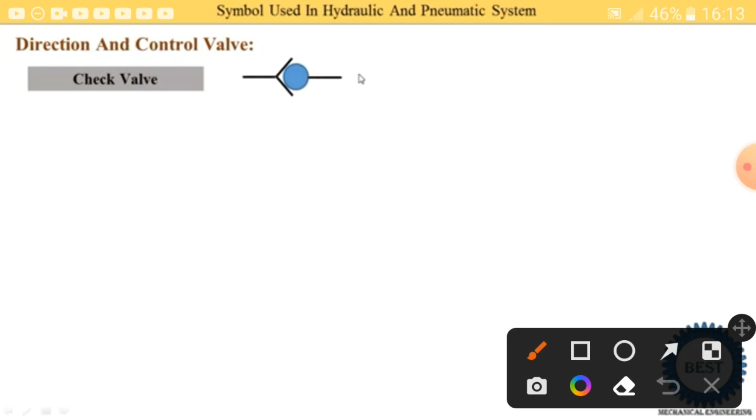Now what is the meaning of check valve? A check valve normally allows fluid, meaning either a liquid or a gas, to flow through it in one direction. So they are one-way valves. The liquid or fluid only flows from one side to another side. Reverse direction is not possible. So this is the symbol of check valve.

Next is the 2x2 valve. Now what is the meaning of 2x2? First we understand that, then we move towards the symbol. The first digit indicates the number of ports. Now what is the meaning of port? Port means it supplies the oil or gas, meaning fluid, from one side to another side. It's like a valve, so it is called the port here. So the port supplies the fluid.

The first digit indicates the number of ports, and the second digit indicates the number of positions. Number of positions means in a directional control valve two positions are possible because here the 2 is written. Now there are 2 positions, so we need to draw 2 squares. So first we draw 1 square.

First we understand how the ports are labeled as P, T, A, B. Generally a 4 port system is used. P means pressure port, so oil or fluid coming from the pump or compressor enters this port, labeled P. The return line is denoted T, meaning tank. And A and B are the different sides of the actuators.

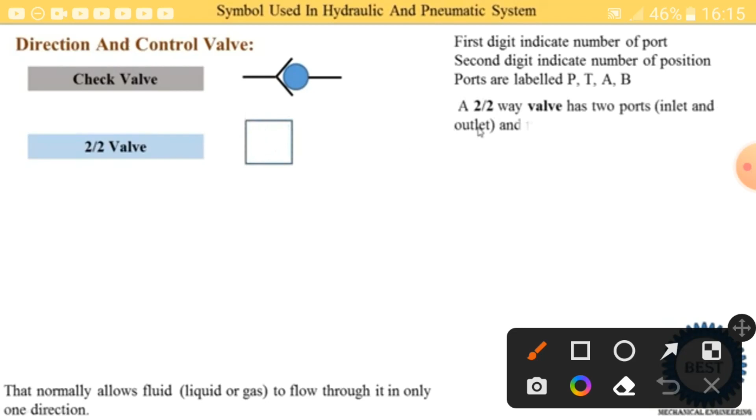So here we draw the 2 squares. The 2x2 valve has 2 ports, one inlet port and one outlet, and 2 positions. One position is used to open the system and the second position is used to close the system. So this is the first square, and this arrow indicates that here the port is P. Why is it P? Because the oil or fluid is coming from the pump or compressor. This is port A, which supplies the actuators. This is one position.

For the second position we need to draw a second square, and the second position is for close. So this symbol is used for the close position. It is also the P port and this is the A port. This is only 2 ports because here it is written as 2.

Now the next one is the 3x2 valve. Later on I explain to you how this symbol works in hydraulic systems. So continue with this video.

The 3x2 valve has 3 ports. One is the inlet, another is the outlet, and one more port. The second digit, 2, indicates 2 positions. One is used to open the system, the second position is used to close the system. There are 2 positions, so we draw 2 squares. And 3 ports means 3 ports are provided in every position, so there are 6 ports in total, 3 in one position.

So here the oil enters the P port and is supplied to the A port. The other one, the T port, is right now in the closed position. Now this is the second position. In the second position, oil returns from the actuators, from port A to port T, and the P port is closed. Here there are 3 ports, named P, T and A: the pressure port, the tank port, and the A port. If there is a 4th, the B port is provided. So I hope you are clear about the number of ports.

In the second position, the oil is supplied from the P port to the B port, and the oil returns from the A port to the T port. This is generally used in double acting actuators, meaning the oil is supplied on both sides of the piston. It is called double acting.

Now the next one is the 4/3 valve. 4/3 means 3 positions are possible and 4 ports are there. So here you see the first position, this is the second position, and this is the third position. Inside every position there are 4 ports.

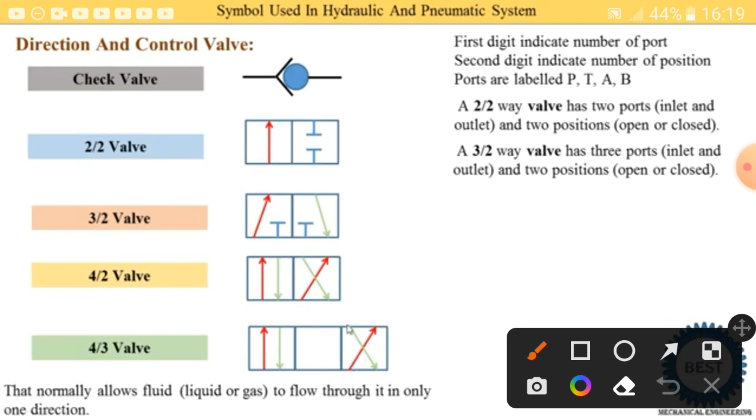In the first position, oil is supplied from P to A, and here B to T. I leave the second, mid position empty because in the mid position there are many variations, which I'll explain later. In the third position, oil is supplied from P to B, and it returns back from A to T.

Okay, so I hope you are clear on this concept. Now before moving ahead, let's discuss the directional control valve mid positions and what possibilities exist in a hydraulic or pneumatic system.

Now the first one is the open center. Here, mid position means we focus only on the mid position ports; the first and third positions are not explained here, we just focus on the mid position.

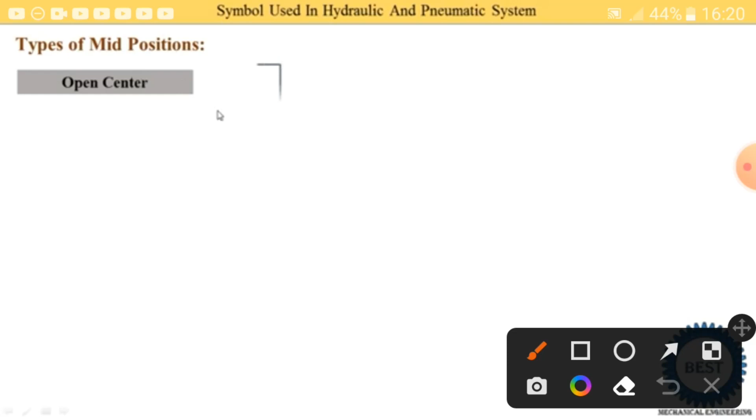Now the first position is the open center. First we draw the square by default. Open center means all 4 ports are connected with each other; it is called the open position. So here P port, T port, A port and B port are connected with each other using this horizontal pipe.

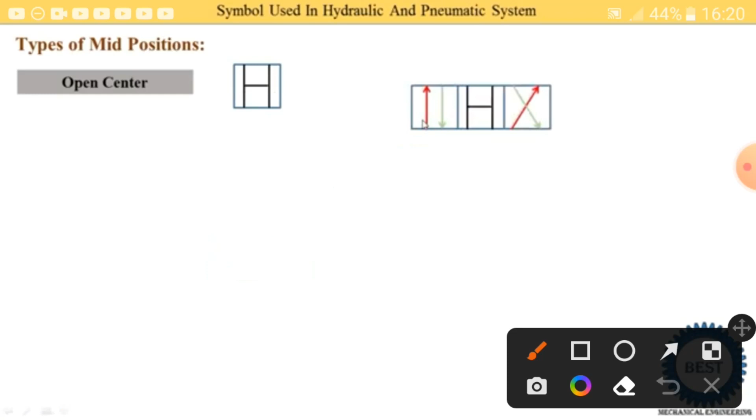So when we use 3 positions, the first and third positions are already explained, now we only focus on the mid position. It is most commonly used in hydraulic motors, where all the ports are connected to one another. So here you see all the ports are connected with each other, and it looks like the H symbol.

In the center position, the hydraulic motor is allowed to free wheel, meaning it can freely rotate the actuator.

Now here you see, when the first position is active in this hydraulic system, which has 4 ports and 3 positions, the oil coming from port P, or from the pump, is supplied to port A. Then the oil is supplied on the left side of the actuator, and the oil present on the right side goes back to the reservoir from port B to port T.

Now when we change to the mid position, all the ports are connected with each other — P, A, B, T are connected, so oil can flow in any direction.

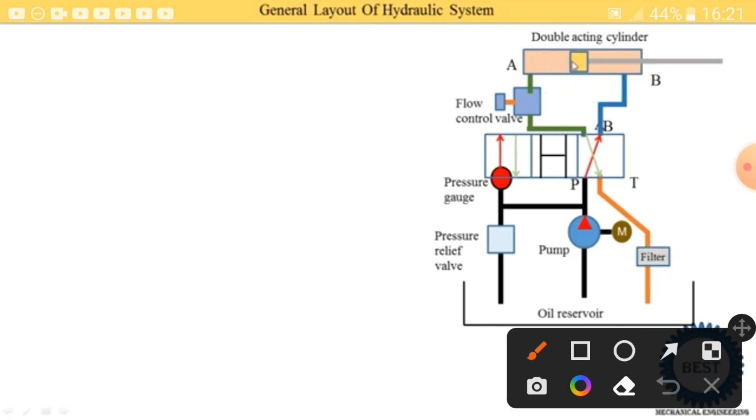Now when we switch to the third position, the oil coming from the pump is supplied to the P port, then from the P port it goes into the B port, then to the B side of the actuator, so the piston moves from the right side to the left side. The oil present on the left side of the piston is supplied to port A, and from port A it goes into port T and then into the reservoir. I hope your concepts are clear.

Now this directional control valve is operated using different systems, which we will also study in this video. Stay connected for that.

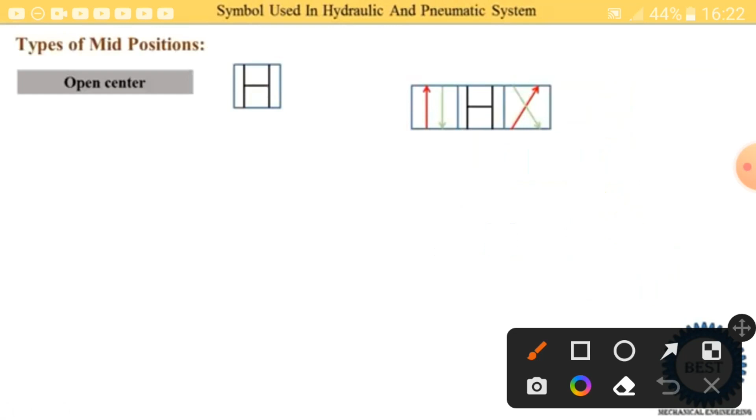Now the second one is the closed center. In the open center, we studied that all the ports are connected. In the closed center, from the name we can understand all the ports are closed. Sometimes we need to close the hydraulic system, so we put it in this mid position, and at that time all the ports are closed.

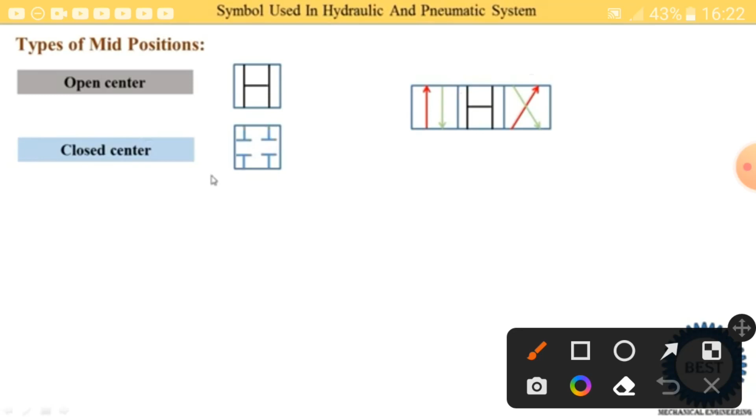For the closed position, we draw it like the T symbol. This is the 3 positions, and in the mid position all the ports are closed, so this blocks all the ports, since the pressure port is blocked. The oil is continuously coming from the pump, so it is then supplied back to the tank through the pressure relief valve.

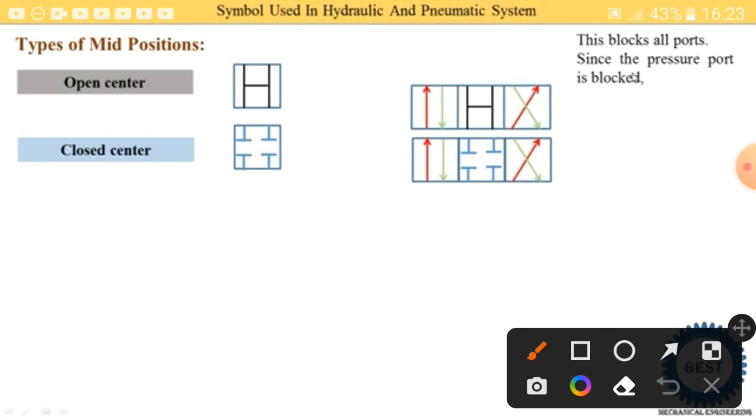That's why the pressure relief valve is more important. Pressure built in the line until it dumps through the relief valve.

Now the third one is the tandem center. In tandem centers, the symbol is drawn here. The oil entering from the P port is again supplied to the T port, meaning P and T ports are connected with each other. So actuator positions are blocked because oil is not supplied to the actuators, and the final output is stop.

Here A and B ports are closed. This is the mid position during tandem centers. The actuator is blocked in position because oil is not supplied from the P port to A and B; it goes back to the reservoir from the T port. The oil flows freely from P to T ports.

Now the fourth one is the regenerative center. In a regenerative center, the P port is connected with both A and B. Oil entering from P is supplied to either A or B, and the T port is blocked. This is the mid position during the regenerative center.

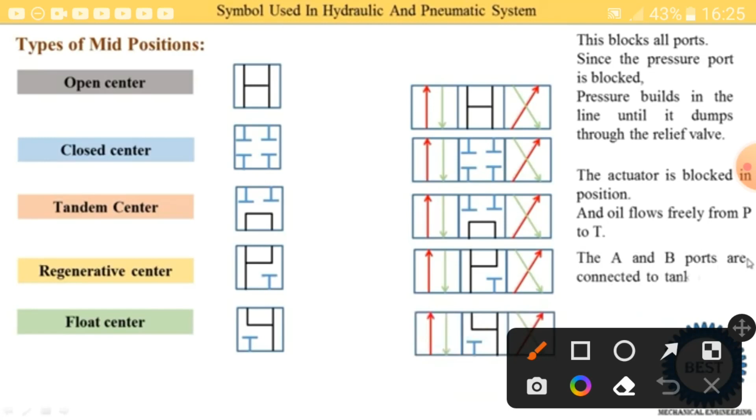The A and B ports are connected to the tank and the pressure port is blocked. Pressure built in the line dumps through the relief valve. So when port P is closed, some pressure is created because the pump is continuously working and supplying oil to the P port. This pressure is reduced by using the pressure relief valve.

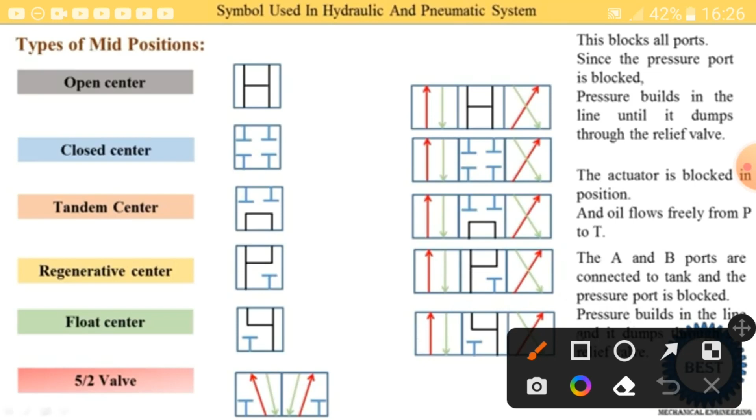Now next, how are the operations of the control valve carried out? There are different options to operate the directional control valve that we are studying here. With this directional control valve, we draw various types of symbols that indicate how the directional control valve is operated.

Next one is the push button operated type. Another is the foot pedal operated, meaning it is operated by our leg, like the accelerator or clutch provided in a 4-wheeler or car. Next one is the roller cam operated, operated by using the cam mechanism.

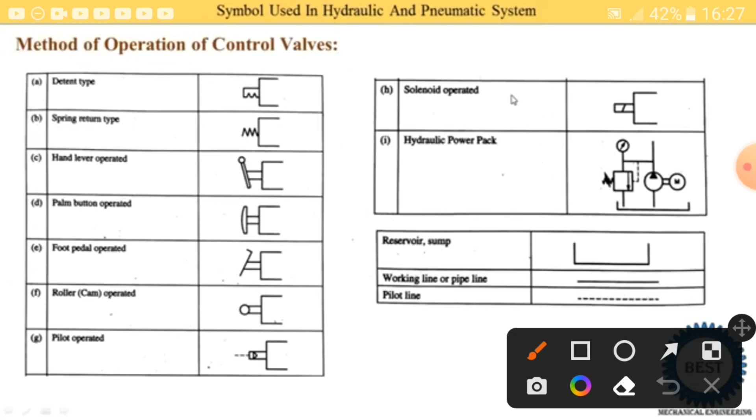Next one is hydraulic power pack, used or operated by hydraulic power, meaning oil coming from the pump; hydraulic energy of the oil is used to operate the directional control valve. This symbol, already shown, is the pilot line as a dash line. The working pipeline is continuous, and this is the symbol of the reservoir in which the oil is stored.